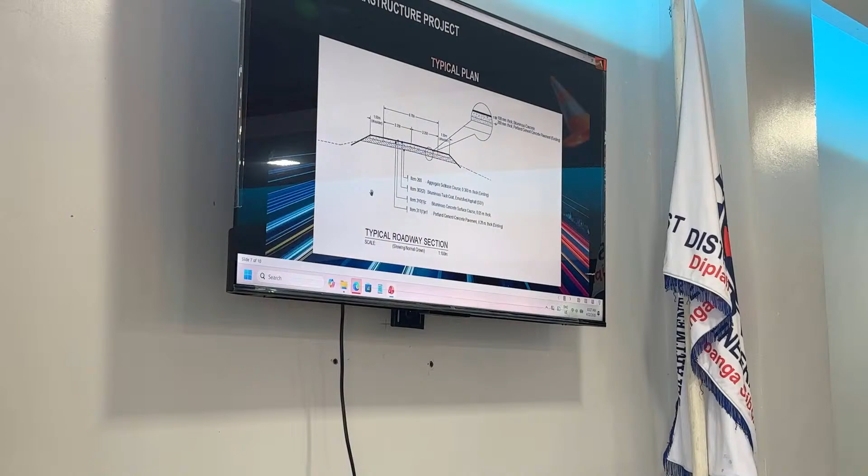Showing the typical plan. Summary of quantities: Part B, other general requirements; Part C, earthworks; Part D, sub-base and base course; Part E, surface course; Part H, miscellaneous structures. That's all for us.

Next, 26JI0014, construction of bypass and diversion roads, NRJ Barangay Balogo to Barangay San Jose, Zamboanga Sibugay. Contract duration 88 calendar days, amounting to 14,181,580.

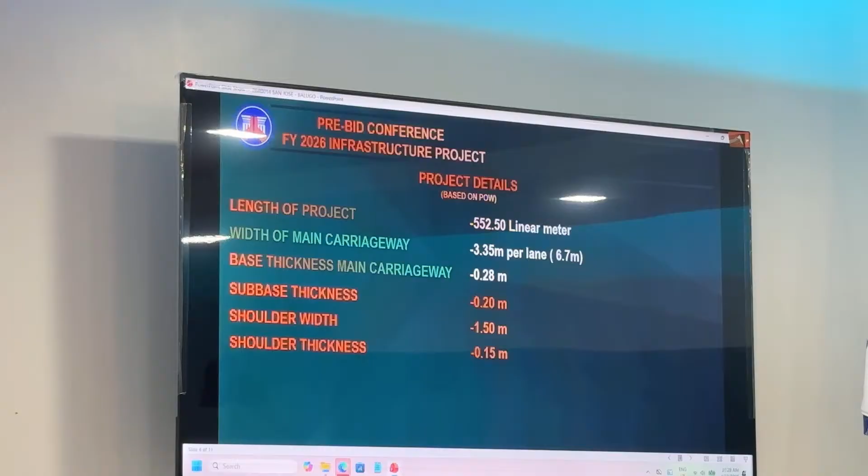Length of the project: 552.5 linear meters. Width of the main carriageway: 3.35 meters per lane. Base thickness 0.28 meters, sub-base thickness 0.2 meters, shoulder width 1.5 meters, and shoulder thickness 0.15 meters.

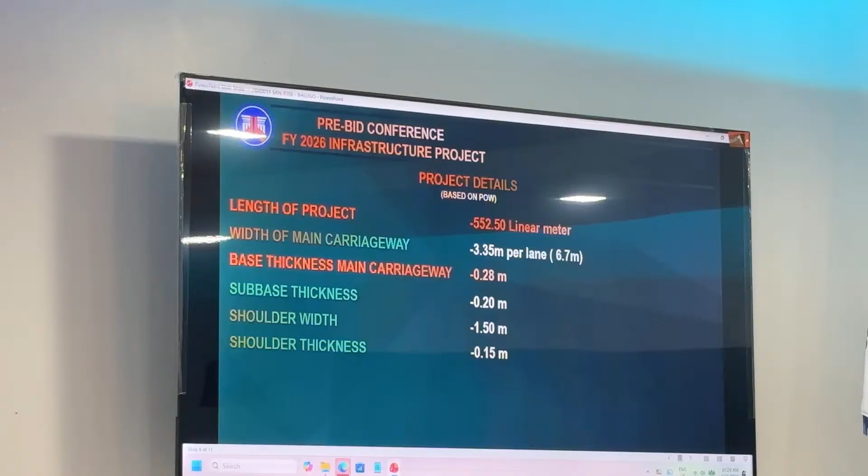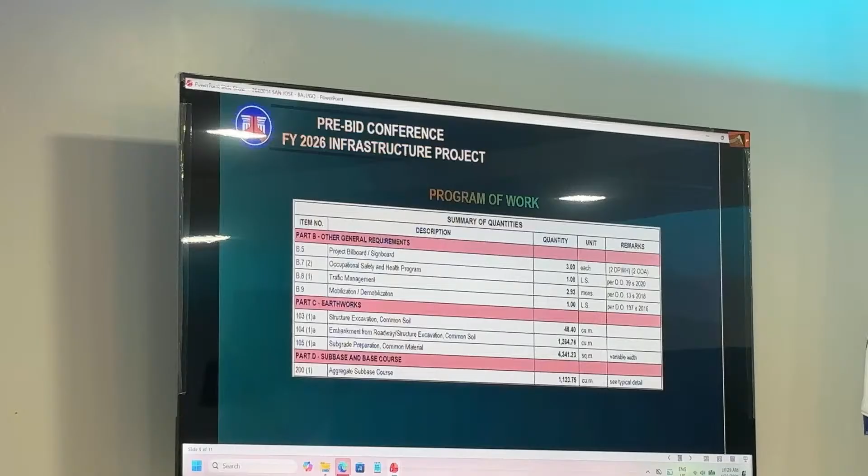Showing the typical plan. Summary of quantities: Part B, other general requirements; Part C, earthworks; Part D, sub-base and base course; Part E, surface course; Part F, bridge construction; Part G, drainage and slope protection structures; Part H, miscellaneous structures.

Next, 26JI0019, construction and improvement of access roads leading to declared tourism destinations, Naga-Naga Calades Tourism Access Road, Alicia, Zamboanga Sibugay. Contract duration 32 calendar days, amounting to 4,254,180.

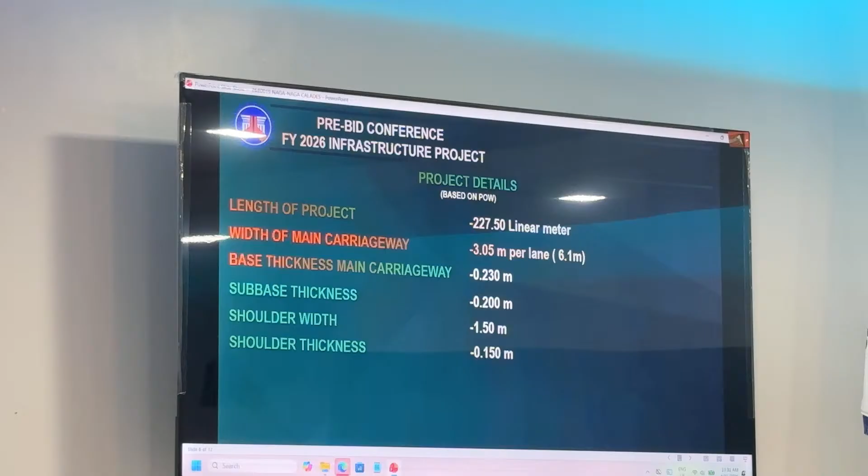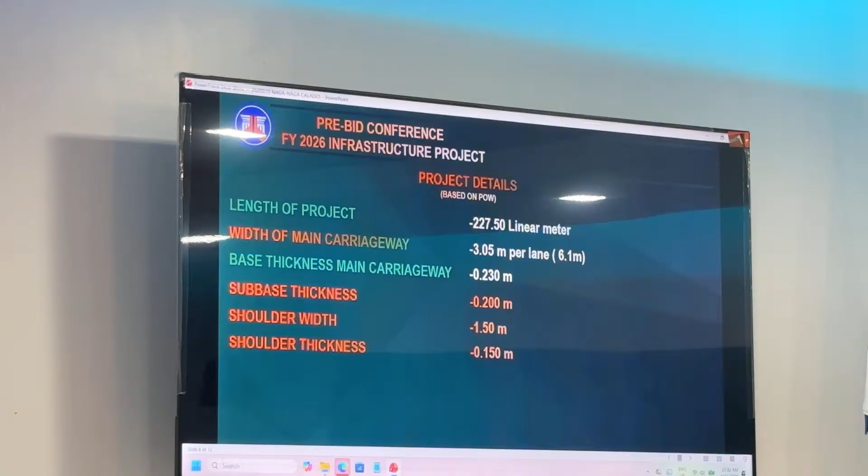Length of the project: 227.5 linear meters. Width of the main carriageway: 3.05 meters per lane. Base thickness 0.23 meters, sub-base thickness 0.2 meters, shoulder width 1.5 meters, and shoulder thickness 0.15 meters.

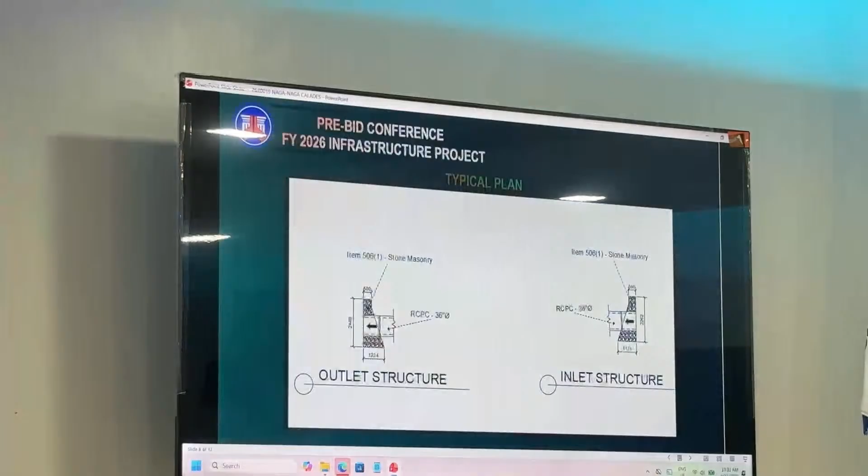Typical plan. Summary of quantities: Part B, other general requirements; Part C, earthworks; Part D, sub-base and base course; Part E, surface course; Part G, drainage and slope protection structures; Part H, miscellaneous structures. That's all.

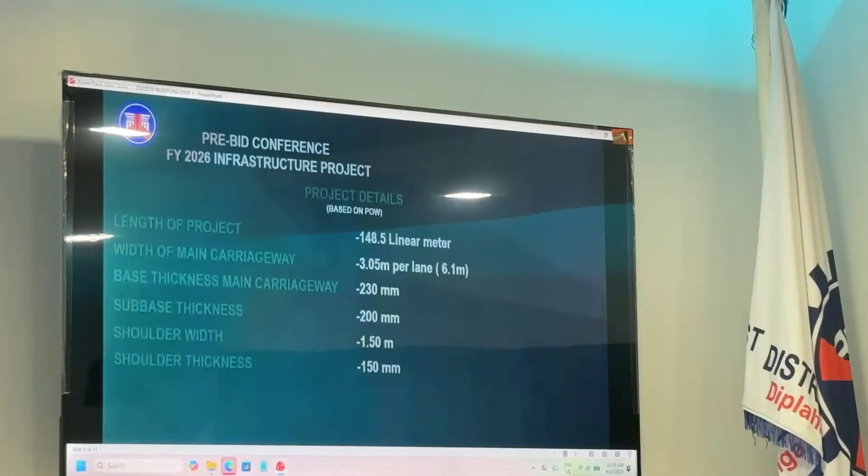Length of the project: 148.5 linear meters. Width of main carriageway: 3.05 meters per lane. Base thickness 0.23 meters, sub-base thickness 0.2 meters, shoulder width 1.5 meters, and shoulder thickness 0.15 meters.

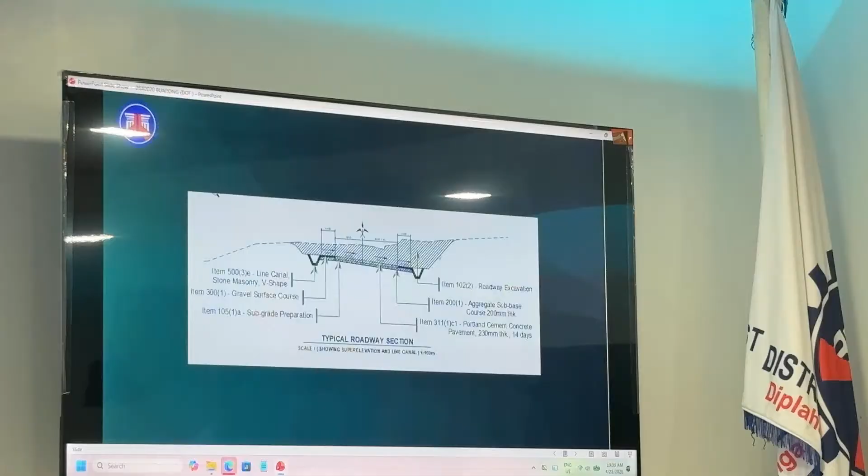Typical plan. Summary of quantities: Part B, other general requirements; Part C, earthworks; Part D, sub-base and base course; Part E, surface course; Part G, drainage and slope protection structures; Part H, miscellaneous structures.

Next, 26JI0022, construction and improvement of access roads leading to declared tourism destinations, NRJ Imelda-Alicia Road to Payao Provincial Road leading to Panggalamatan Beach, Payao, Zamboanga Sibugay. Contract duration 125 calendar days, amounting to 28,362,180.

Length of the project: 1,060 linear meters. Width of main carriageway: 3.05 meters per lane. Base thickness 0.23 meters, sub-base thickness 0.2 meters, shoulder width 1.5 meters, and shoulder thickness 0.15 meters.

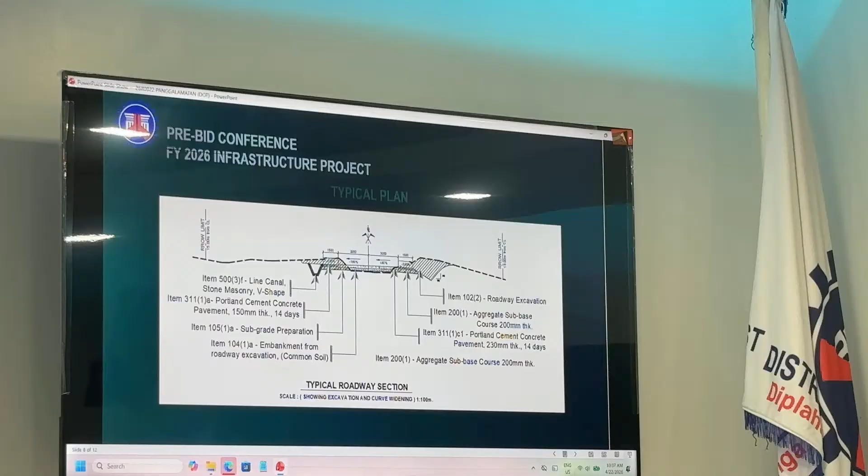Typical plan. Summary of quantities: Part B, other general requirements; Part C, earthworks; Part D, sub-base and base course; Part E, surface course; Part G, drainage and slope protection structures; Part H, miscellaneous structures.

Next, 26JI 0024: construction improvement of access roads leading to trades, industries, and economic zones. Junction Imelda-Alicia, Lutiman, Dicam Road connecting Junction Imelda and Barangay Sawa in support of the seaweed and coconut industry in Zamboanga Sibugay. Contract duration is 39 calendar days.

Amounting to 4,727,520 pesos. Length of the project is 136 linear meters. Width of the main carriageway is 3.35 meters per lane. Base thickness is 0.28 meters, sub-base thickness is 0.2 meters. Shoulder width is 1.5 meters and shoulder thickness is 0.15 meters.

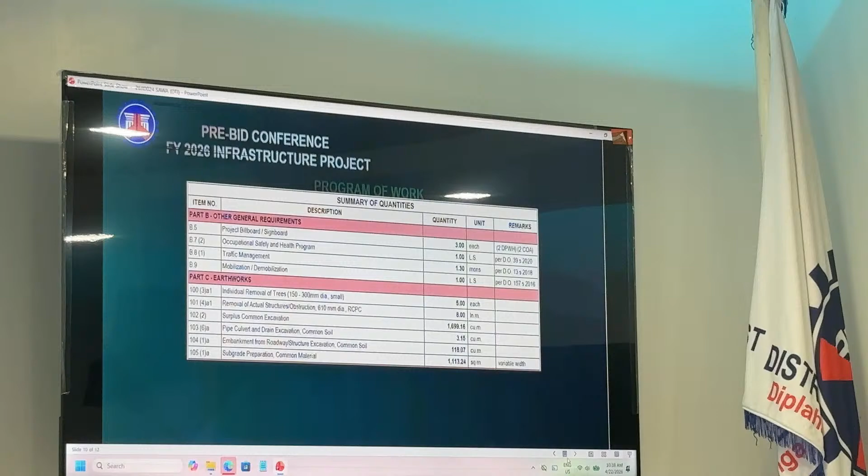Typical plan. Summary of quantities: Part B, general requirements; Part C, earthworks; Part D, sub-base and base course; Part E, surface course; Part G, drainage and slope protection structures; Part H, miscellaneous structures.

Presenting the next project, we have 26JI 0025: construction improvement of access roads leading to trades, industries, and economic zones, NRJ, Imelda-Alicia Road, connecting Barangay Calades to Barangay Balogo, Zamboanga Sibugay, supporting the coconut plantation.

With 60 calendar days contract duration in Zamboanga Sibugay, with an ABC of 9,454,060 pesos.

This is the approved plan. For the project details, we have a length of 280 linear meters with a width of main carriageway of 3.35 meters per lane, which is 6.7 meters total.

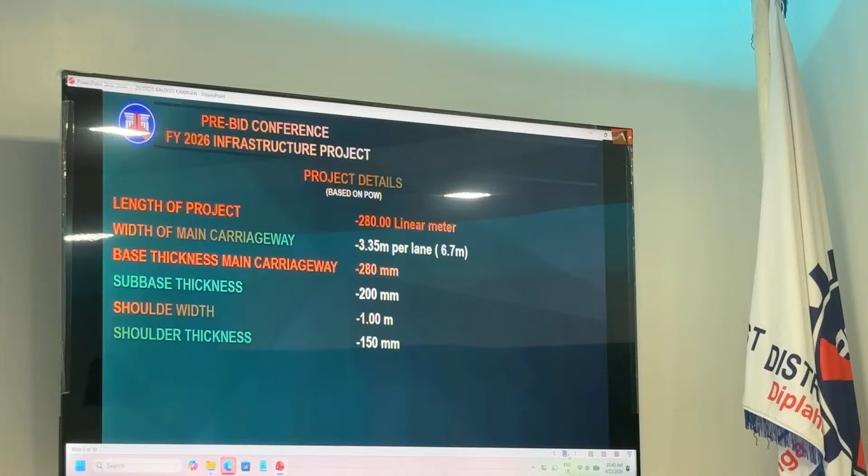The base thickness of the main carriageway is 0.280 meters, then the sub-base thickness is 0.2 meters. For the shoulder width, we have 1 meter and a shoulder thickness of 0.15 meters.

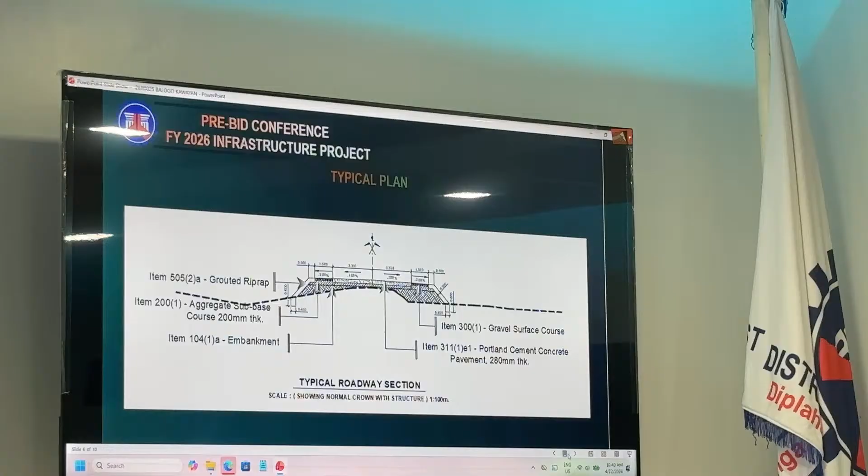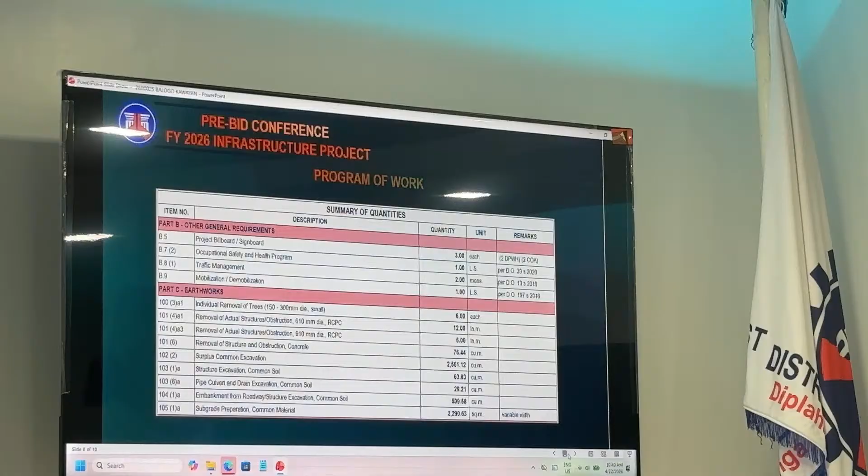Showing you the typical plans. For the program of works, summary of quantities, we have Part B, other general requirements; Part C, earthworks; Part D, sub-base and base course.

Then Part E, surface course; Part F, bridge construction; Part G, drainage and slope protection structure; and Part H, miscellaneous structures.

For the next project, we have 26JI 0026: construction improvements of access roads leading to trade, industries, and economic zones. Road at Barangay Fatima in support of the coal industry, seaweeds, and coconut, leading to Provincial Road and National Highway in Payao, Zamboanga Sibugay.

With a contract duration of 39 calendar days, the location of the project is at Barangay Fatima, Payao, Zamboanga Sibugay, with an ABC of 4,727,520 pesos.

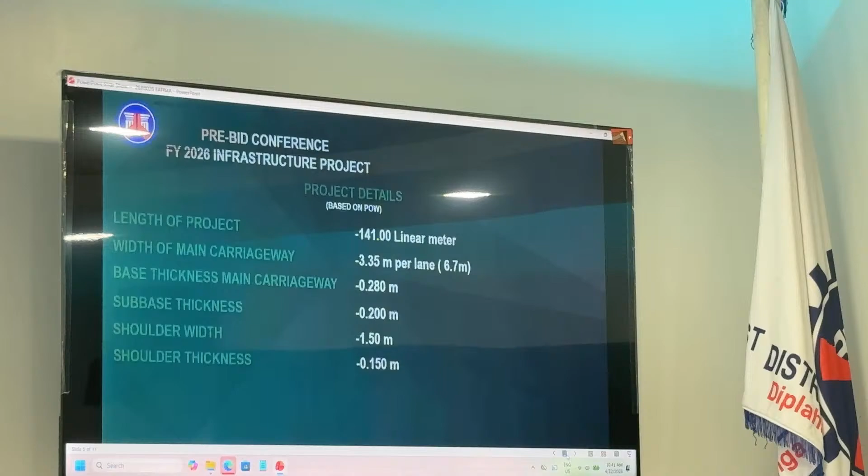This is the approved plan. For project details, we have a length of project of 141 linear meters with a width of main carriageway of 3.35 meters per lane, with a base thickness of the main carriageway of 0.28 meters.

Sub-base thickness is 0.2 meters with a shoulder width of 1.5 meters, having a shoulder thickness of 0.15 meters.

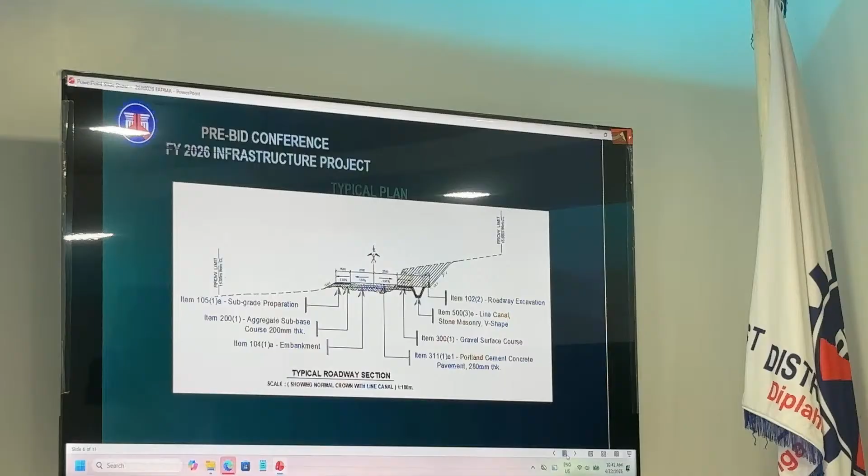Showing you the typical plan. For the summary of quantities, we have Part B, general requirements; Part C, earthworks; Part D, sub-base and base course.

Part E, surface course; Part G, drainage and slope protection structures; and Part H, miscellaneous structures.

For our next project, we have 26JI 0030: access roads and bridges from the national roads leading to major strategic public buildings and facilities, road concreting of Barangay Payao, Zamboanga Sibugay.

With a contract duration of 109 calendar days, with an ABC of 19,404,000 pesos.

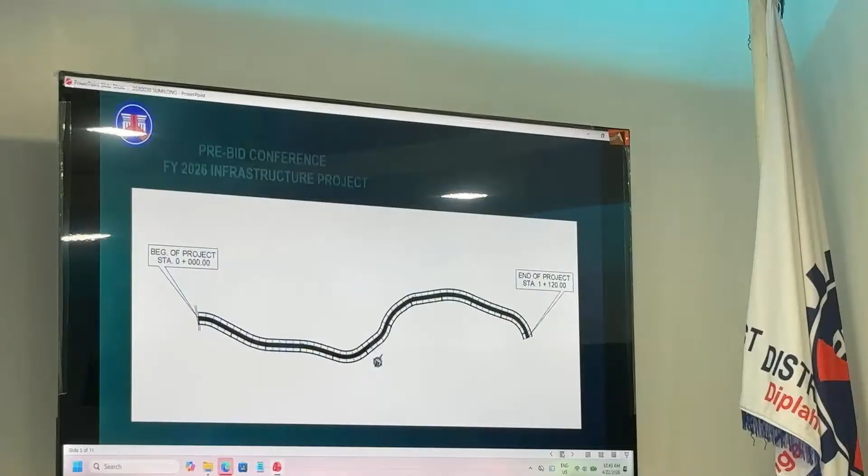This is the approved plan. The traverse of the project. For the project details, the length of the project is 1,120 linear meters with a width of main carriageway of 3 meters per lane.

Base thickness is 0.2 meters and sub-base thickness is 0.2 meters. Shoulder width is 1.5 meters with a shoulder thickness of 0.15 meters. Showing you the typical plan.

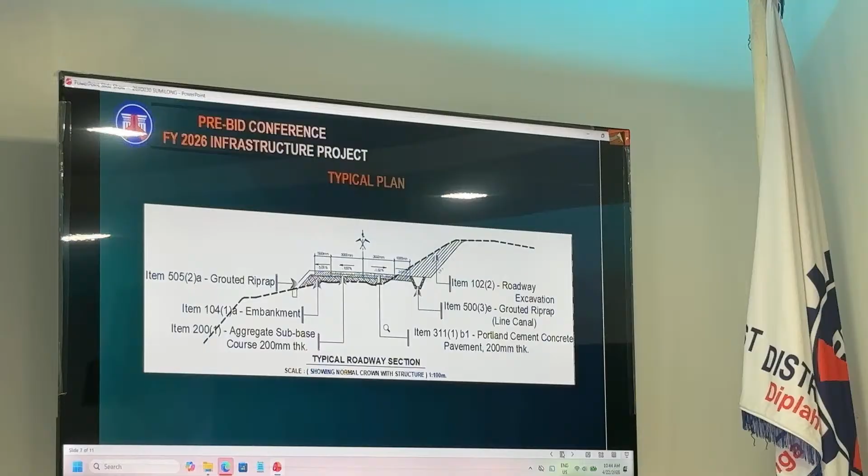For the summary of quantities, we have Part B, other general requirements; Part C, earthworks; Part D, sub-base and base course; Part E, surface course; Part G, drainage and slope protection structures; and Part F, miscellaneous structures.

Next project, we have 26JI 0031: construction of road, Barangay Naga-Naga, Zamboanga Sibugay, with a contract duration of 114 calendar days, with an ABC of 23,876,820 pesos.

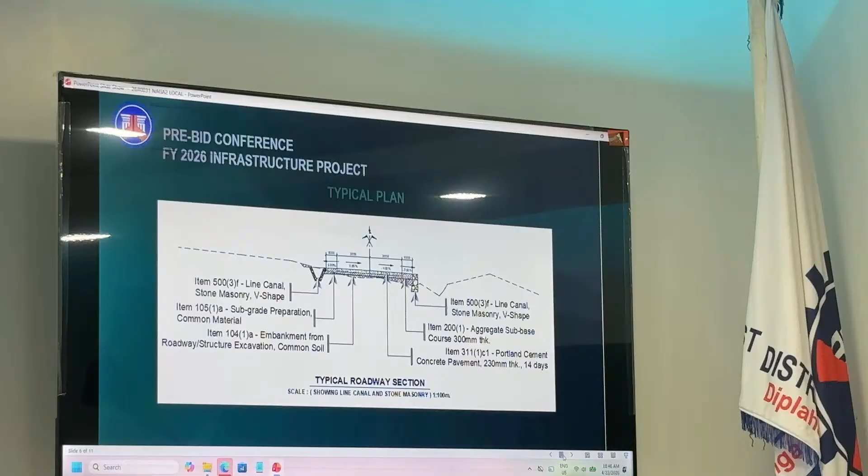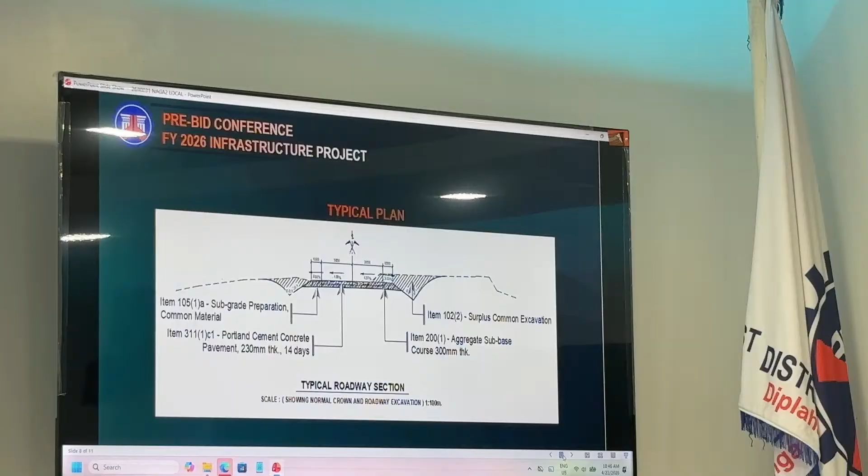Showing the typical plan. For the summary of quantities, we have Part B, other general requirements; Part C, earthworks; Part D, sub-base and base course.

Part E, surface course; Part F, bridge construction; Part G, drainage and slope protection structure; and Part H, miscellaneous structures.

We have 26 JI 0084. Construction of road, Barangay Naga-Naga-Alicia.

26 JI 0032. Construction of road, Barangay Imelda-Alicia, Zamboanga Sibugay, with a contract duration of 39 calendar days and an ABC of 4,775,760 pesos. So this is the approved plan.

For the project details, we have a length of project of 209.5 linear meters, width of main carriageway of 3.05 meters per lane, with a base thickness of main carriageway of 0.23 meters, sub-base thickness of 0.2, shoulder width of 1.5 meters, and shoulder thickness of 0.15 meters. Showing you the typical plan.

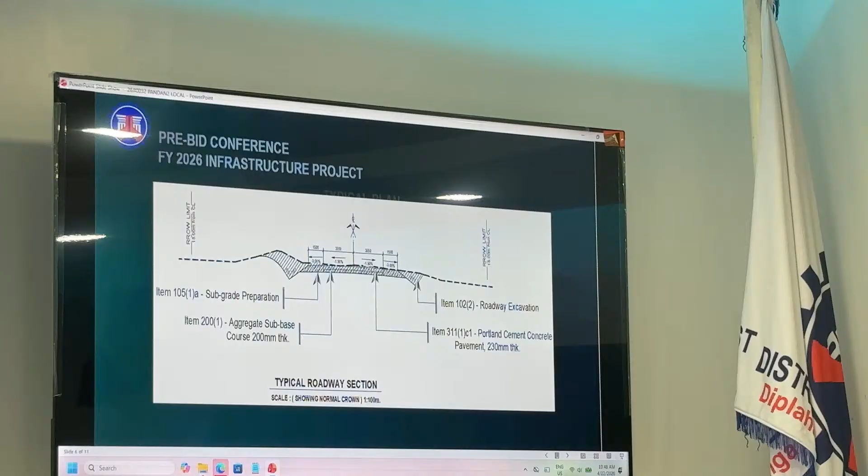For the summary of quantities: Part B, other general requirements; Part C, earthworks; Part D, sub-base and base course; Part E, surface course; Part G, drainage and slope protection structures; and Part H, miscellaneous structures. So that's all for the road projects.

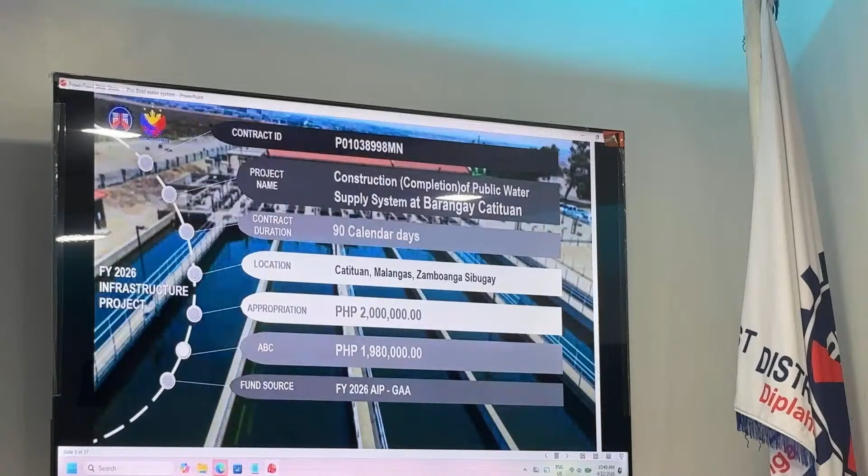First is the construction, completion of public water supply system at Barangay Catituan, Malangas, with a contract ID P01038998MN, with an initial amount of 1,980,000.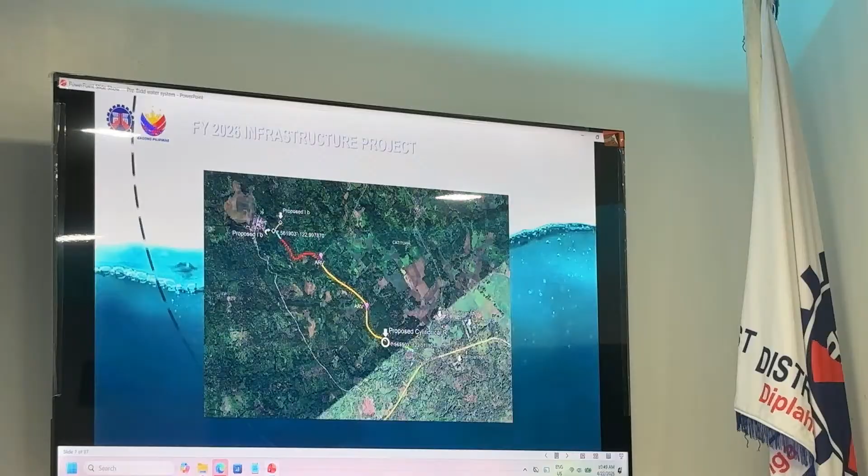Second is the project: construction, completion of public water supply system at Barangay del Pilar, Malangas, Zamboanga Sibugay, with a contract ID P01039000 MN, with an initial amount of 1,980,000.

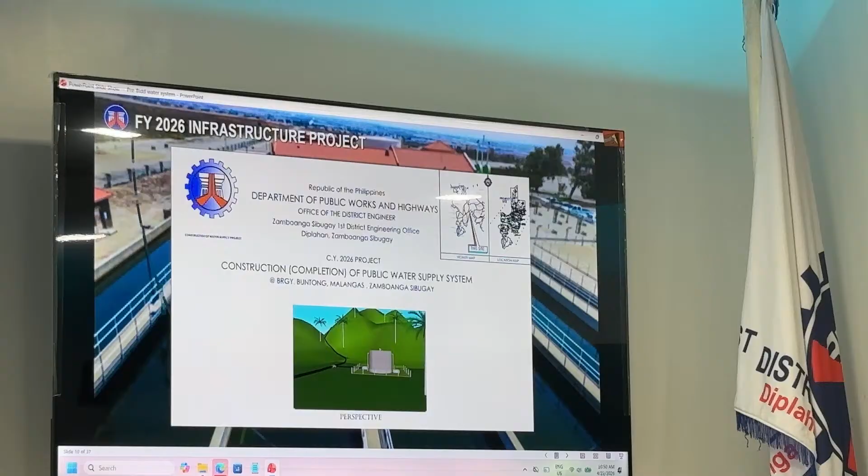Same scope of works: construction of cylindrical tank and intake pumps. Showing the pipeline installation.

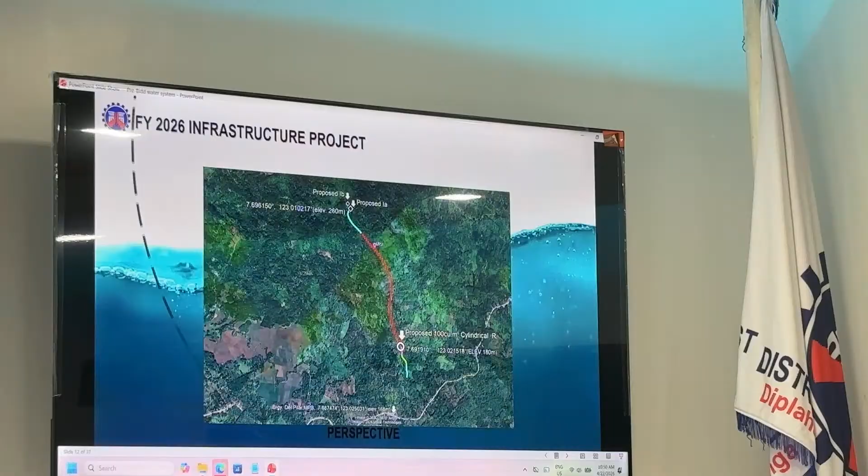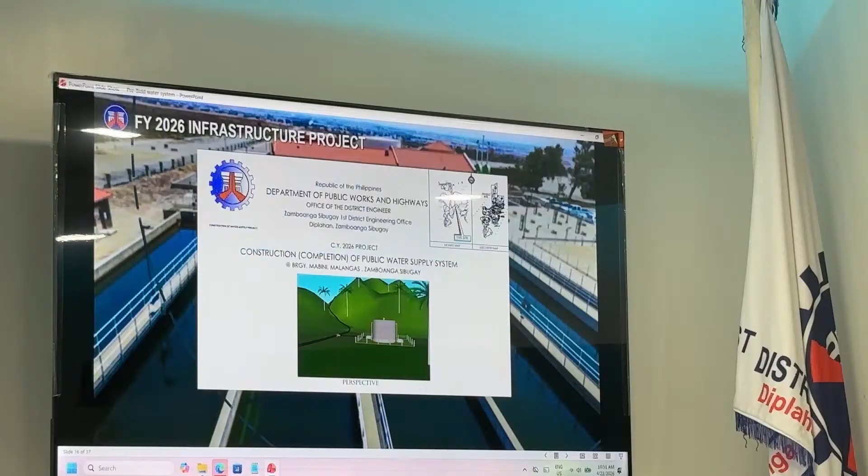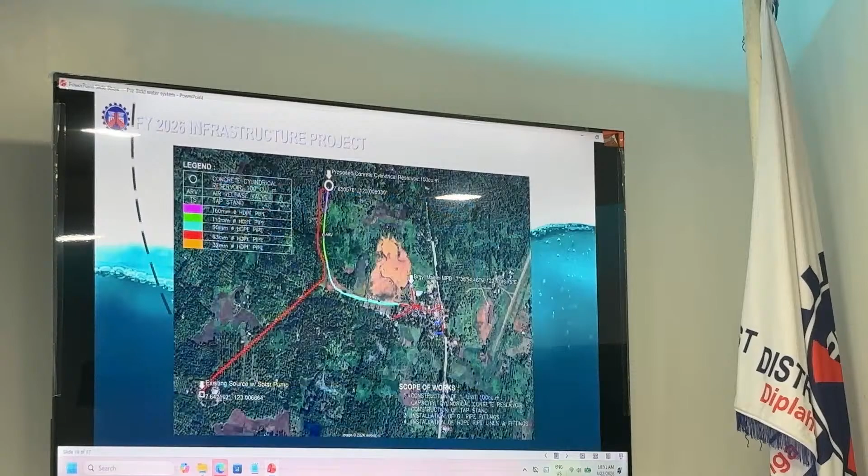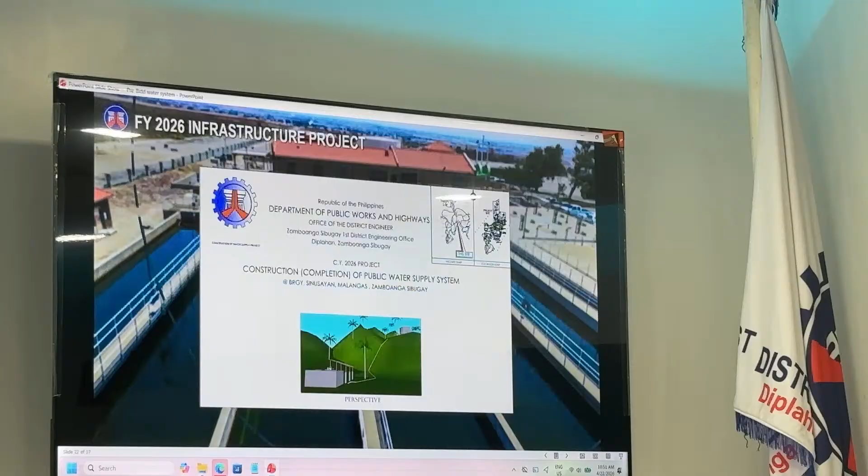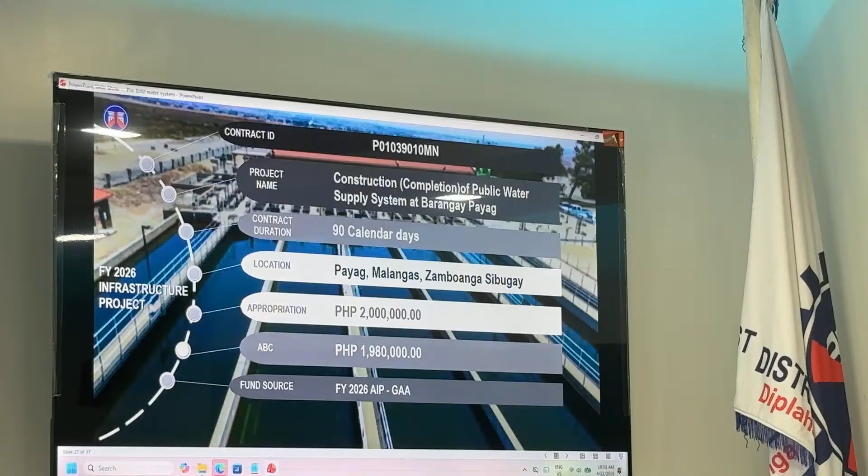Next is the construction, completion of public water supply system at Barangay Payag, Malangas, Zamboanga Sibugay. The contract ID P01039010 and an ABC amount of 1,980,000. This is also a level 1 category of the system.

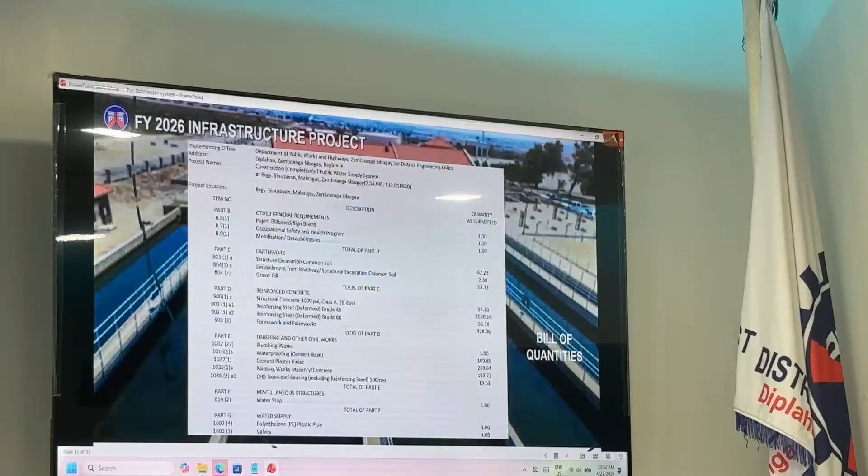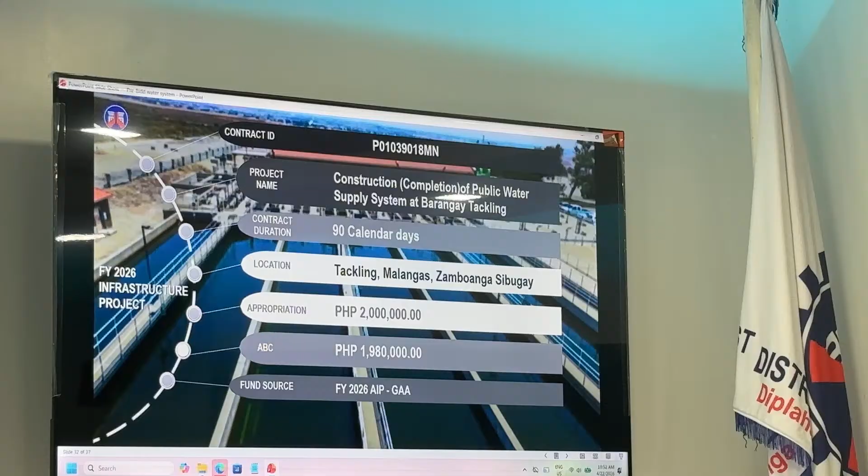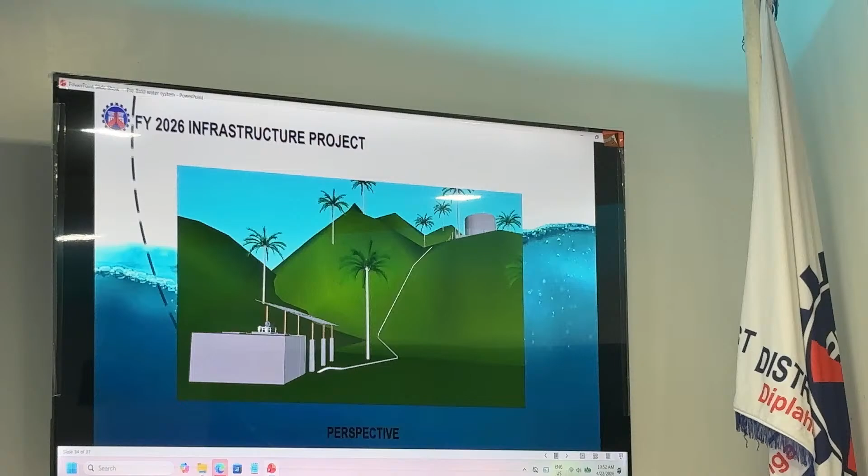And the last is construction, completion of public water supply system at Barangay Tackling, Malangas, with a contract ID P01039018 and an ABC amount of 1,980,000. Showing the scope of works in the pipe and layouts. This is level 2 category. And that's all, thank you, planning and design engineers.

This pre-bid conference is conducted in accordance with RA 12009 and its IRR, in order to clarify the provisions of the bidding documents, address concerns from prospective bidders, and ensure proper understanding of all requirements prior to submission.